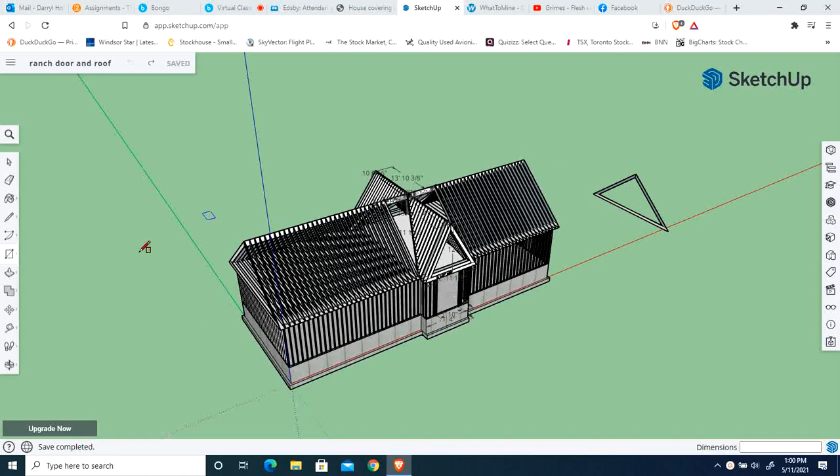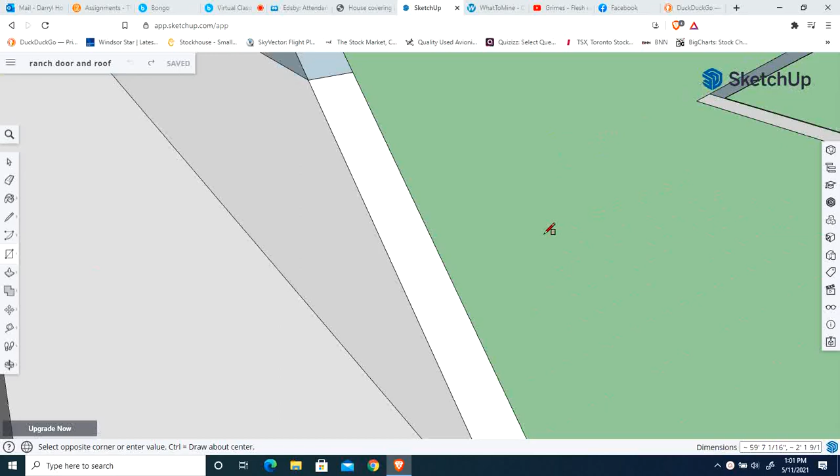This video is going to be the roof covering assignment for the ranch home. First thing you want to do is grab your rectangle option. I'm going to zoom into this portion. You may or may not have a peak. Okay, so if you don't have a peak and you have a flat top right there, just start at this corner. I'm going to start at the peak, and I'm going to go diagonally to the other corner, and let's click right here, and it should cover everything. If it doesn't, check for alignment of your truss system.

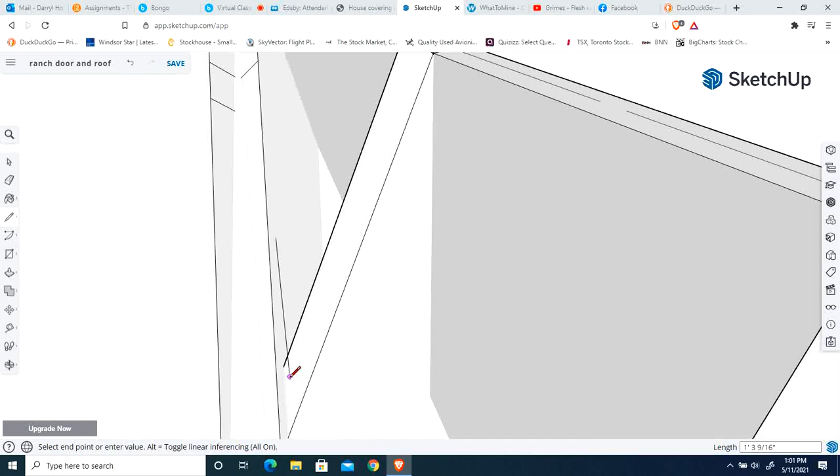Okay, now this next step is kind of finicky. First thing I would like to start with is from this corner here. Let's zoom in here, okay? And we're going to go there. Let's go up here and back to where we started, and it should cover that. This is essential, okay, that we do that. Don't forget this is a component, so in order to close up that gap, we need to click on all, in this case, 3 sides.

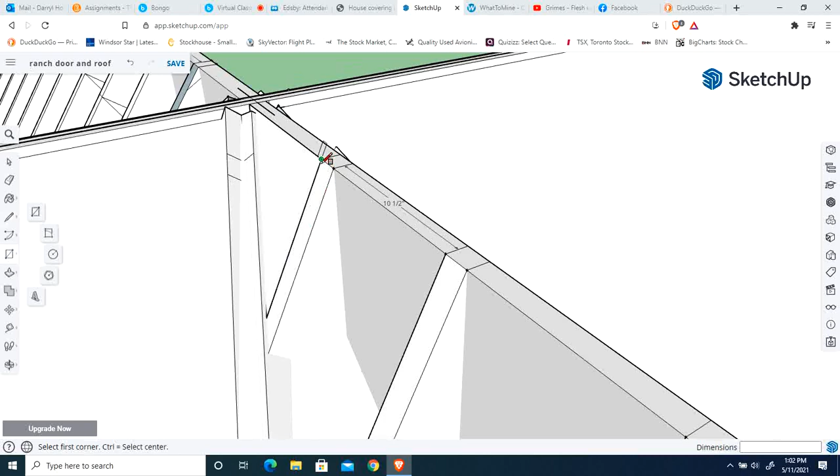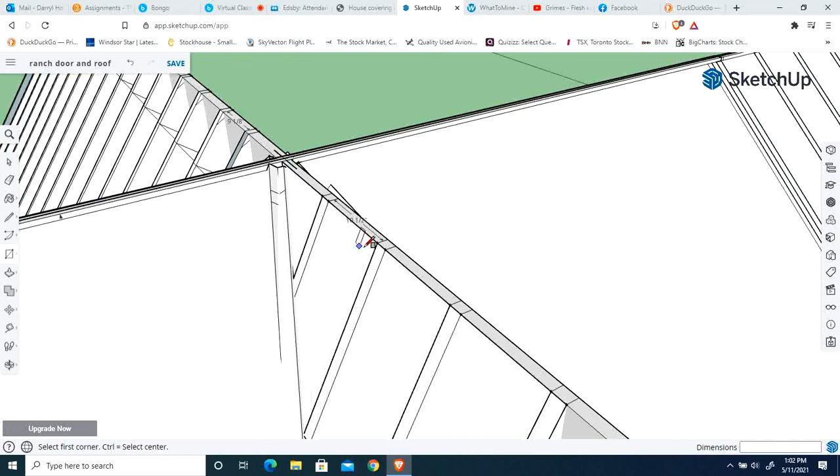Also, what this does is it sets us up for alignment using the rectangle option. So if we go here, click on the first one. Now, this is where you might be tempted to get kind of greedy. So if we went over here and brought this down, you want to make sure you see that green line, okay? That green line means alignment. That's really important. So let's click on that first corner.

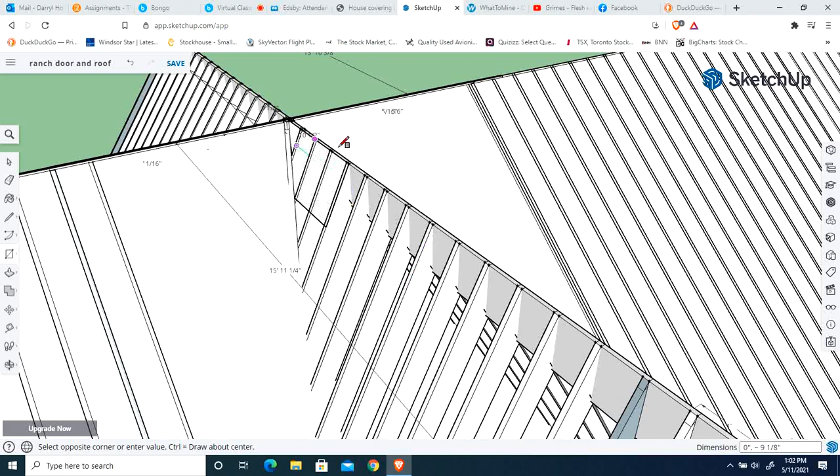If you can manage to get this in one fell swoop, I would say that's fantastic. But I've just been finding that because the geometry on this particular item is not 100%, that a little bit at a time has tended to work a lot better. So it just depends on how lucky you get. So if you get something like this, you see the alignments going off there. That's something you want to avoid.

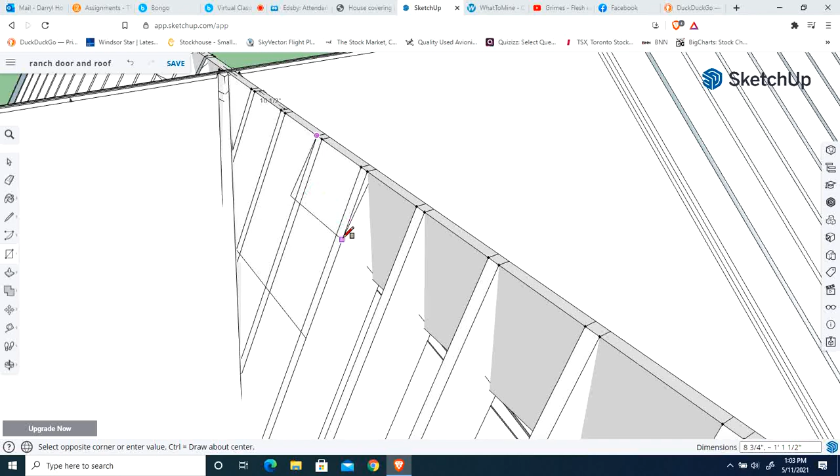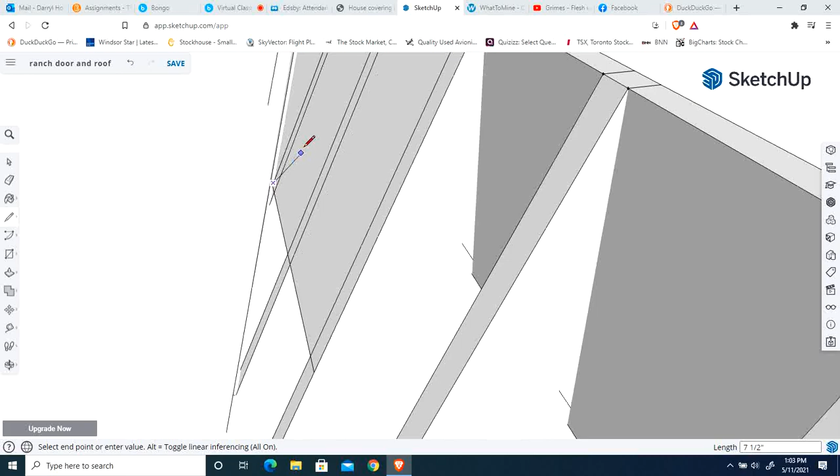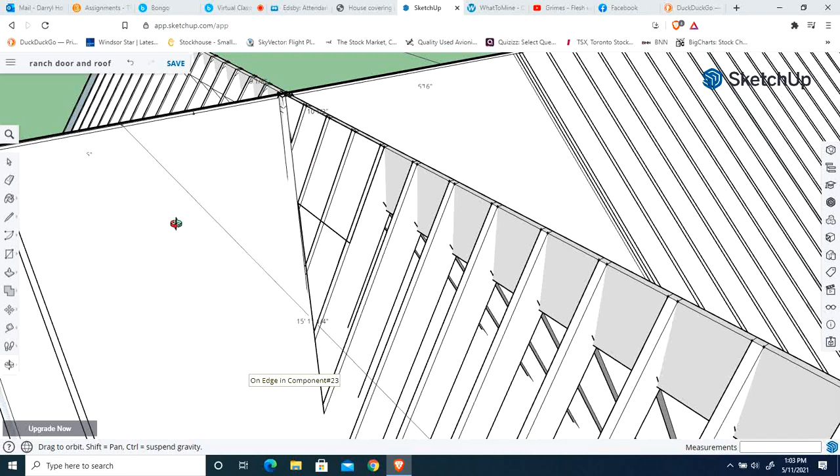If you end up with something where it just doesn't want to grab it, one thing you might want to try would be going down into here, finding that intersection point, and let's just fill that in over to there. And sometimes what that'll do is it'll give SketchUp a line to go to. Yes, just like so.

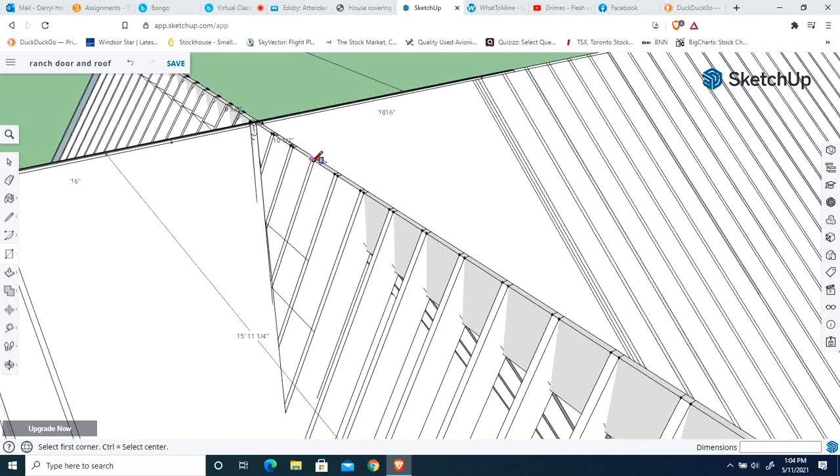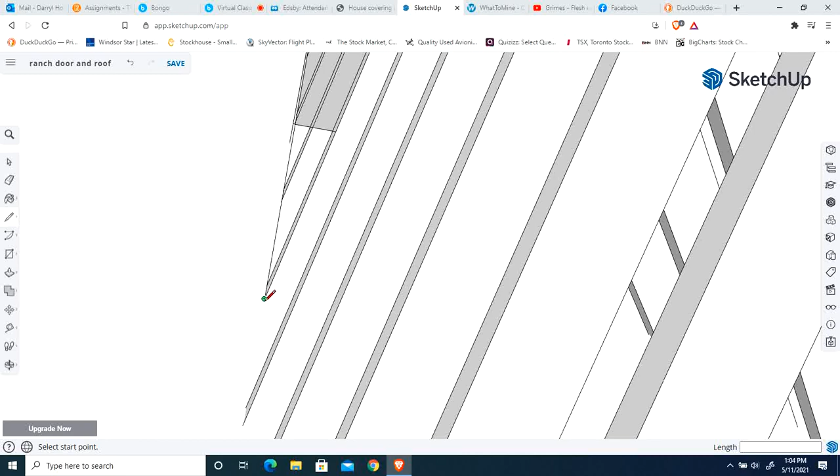So what we had there was SketchUp saw this flat, saw this point here, but it needed to see that line to achieve the correct alignment, okay? So now you may be tempted, as I am here, let's just keep going, you see, and pass that line. So let's continue our line that we created. Once again, you might be tempted to do this line in one fell swoop. And if that works for you, I say wonderful. There we go. Perpendicular line. Okay, it's on the edge of the component.

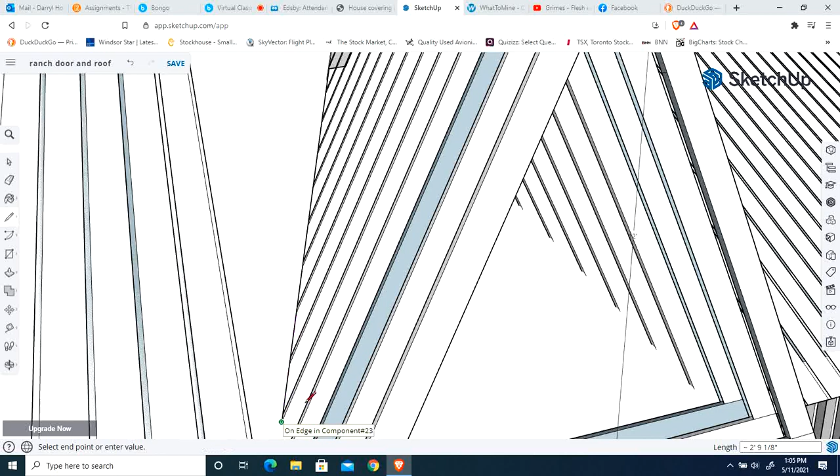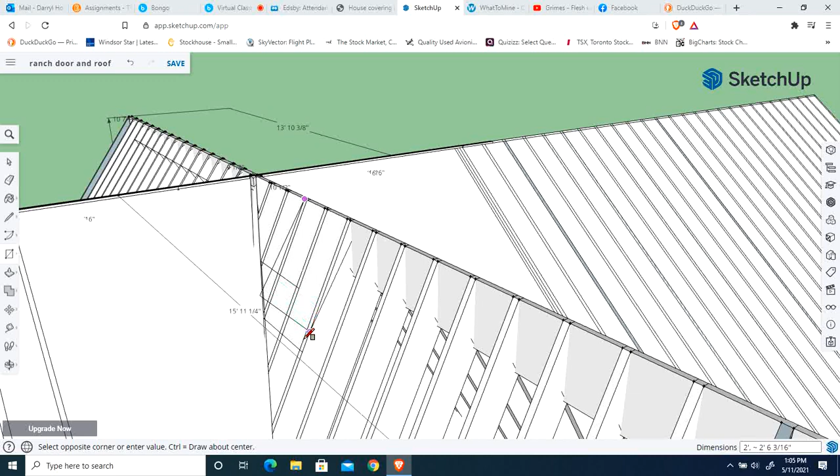Okay, so let's go back. Let's use our rectangle option. I would encourage you to start at the first corner. Okay. So something like so.

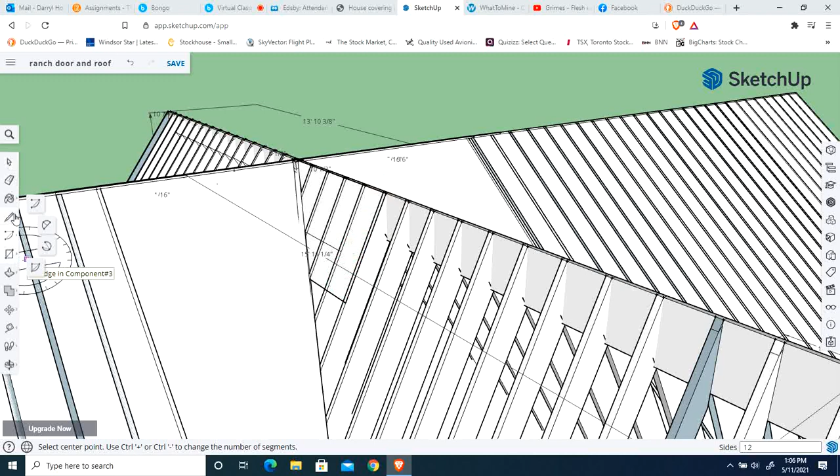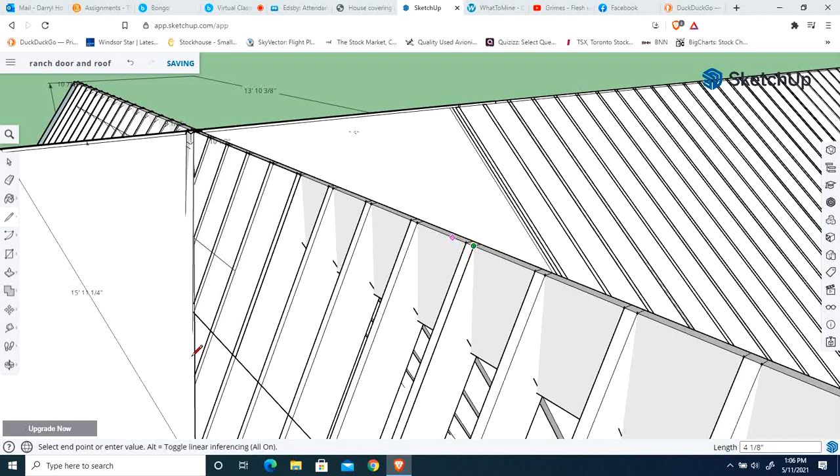Okay. So you get to the point where you've kind of gotten stuck. One thing you could do is grab your pencil option, something like so, and draw yourself a straight line. And go back up. And let's just realign this. Keep in mind this is a component, so it does not see all these lines. Go to there, and we fill that in nicely, just like so.

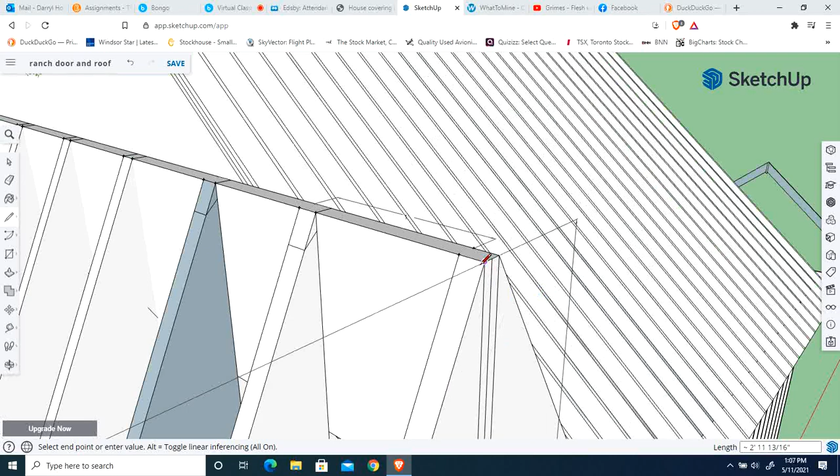So rectangle, if the alignment becomes an issue, which it may or may not, depending on how you stretched it using the scale option, you may find pencil is the way to go. So let's just cruise back on over here. Now we're doing a rectangle, so remember, you're going to have to do all four sides once again. Okay. So we fill that in nicely. Okay. Perfect.

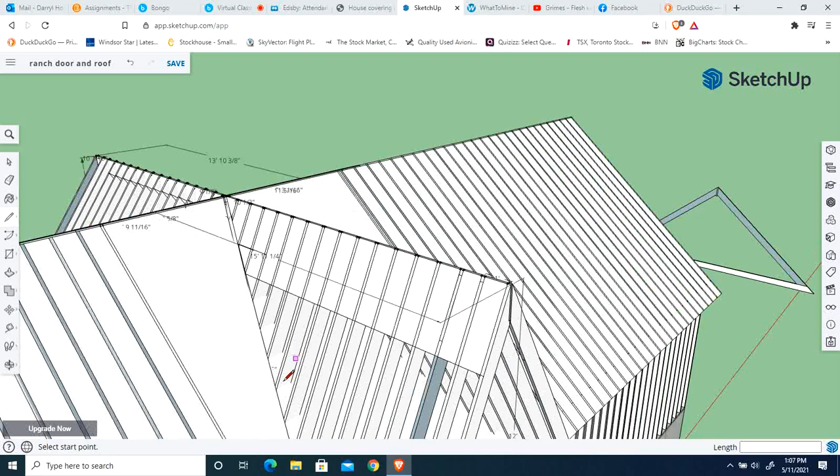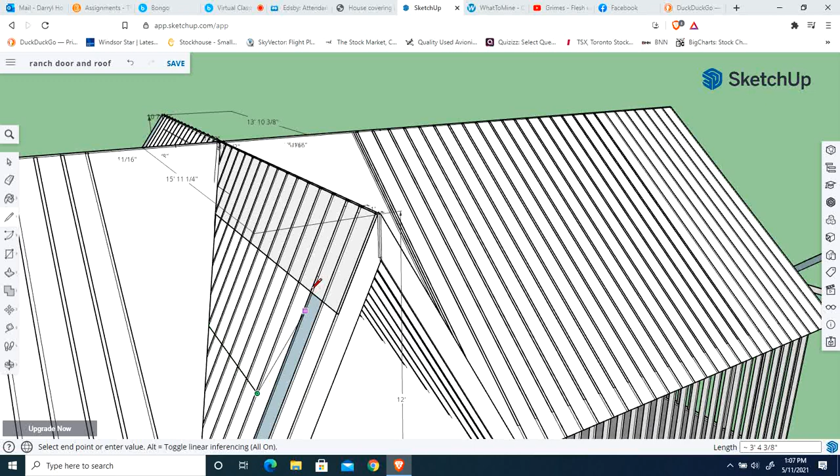So what we could do is we could go down. We've got this line all the way. Let's try going from here. And let's go straight on over. Let's see if it lets us. So it should turn green at one point. That did, there we go. If we're getting too greedy, maybe it's trying to tell us a message. Okay, let's just go click. Filled it in, perfect, okay. Okay, go back up to there, and it's filled in nicely.

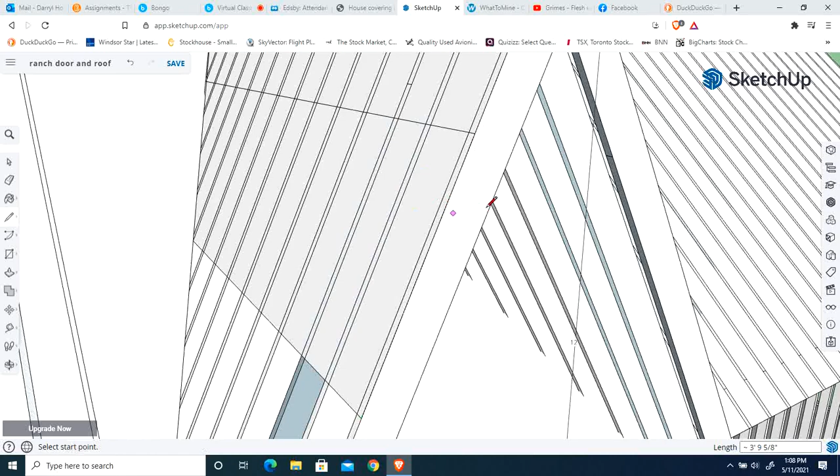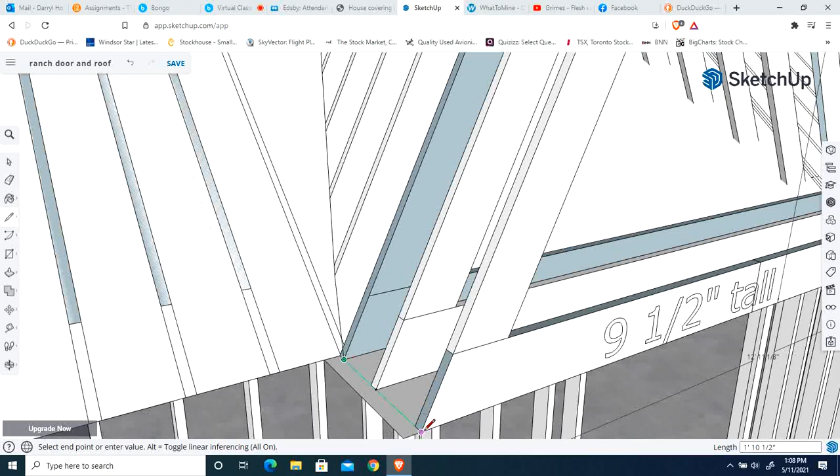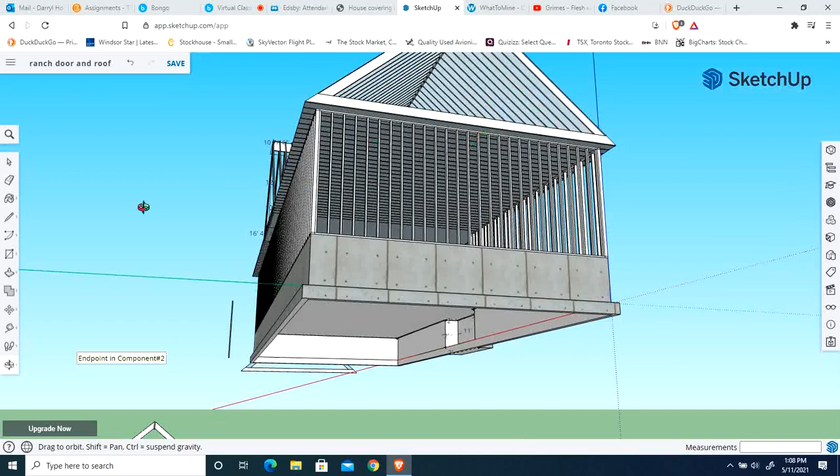Okay, let's go to here, and go down to here. Okay. Keeping in mind, it is a component. So let's fill that in. Okay, that's how you do your dormer. Now, that's how you'd finish all the dormer. And just as a quick demonstration, this should go a lot easier. Just go corner to corner, like so. Okay, there we are.